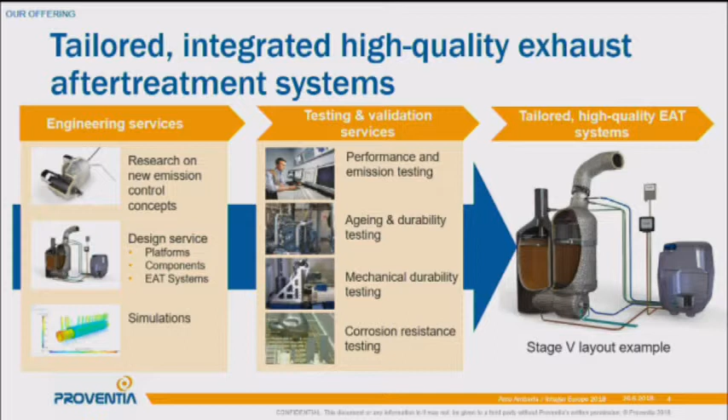Other business area is test solutions, where we are doing container-sized test cells. Our activities cover engineering services of the after-treatment, all the testing validation on the product, and then eventually also manufacturing of the systems for Stage 5 and other emission requirements.

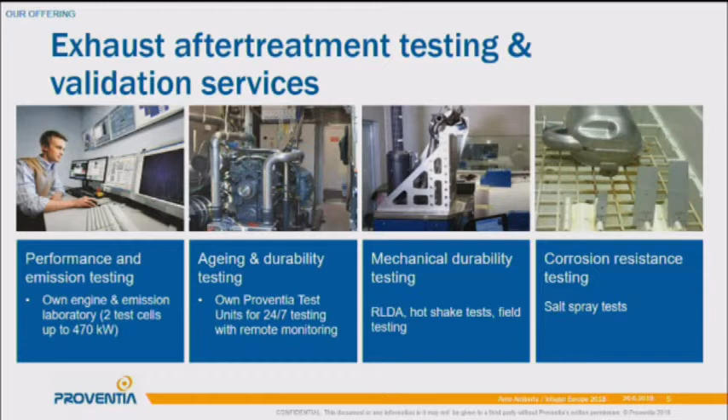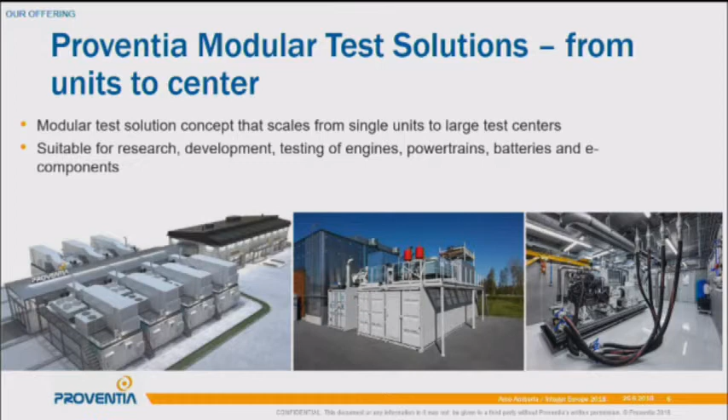So we do in-house performance emission testing, aging and durability testing of the systems, mechanical testing as well, corrosion testing. On the test solution side, we can do container-sized test cells for diesel or other fuel cells or other fuel combustion engines, as well as the whole drivetrain, including possible hybrid units in the drivetrain.

Then going to Stage 5, state-of-the-art design and experience. The market drivers, they are the same as what was also mentioned by Mr. Joshi from Liebherr. So the fuel economy, cost efficiency of the systems. Right now, Stage 5 and China 4 are having a discussion of possible EGR dropout. That increases engine-out NOx emissions, and therefore SCR has to have higher efficiency.

Also, it's expected to have engine rated speed drop down, also because of saving fuel, and real-world emissions and in-use testing is going to be in place on Stage 5, and therefore the actual emissions from the engine has to be at a low level in any use.

Limited space and compact design, that is always the driver on the non-road side. All the manufacturers are claiming that their application is the most difficult in terms of space. That is what we have heard, whether it's tractor, excavator, or whatever application, always the manufacturer says that their application is the most critical in terms of space.

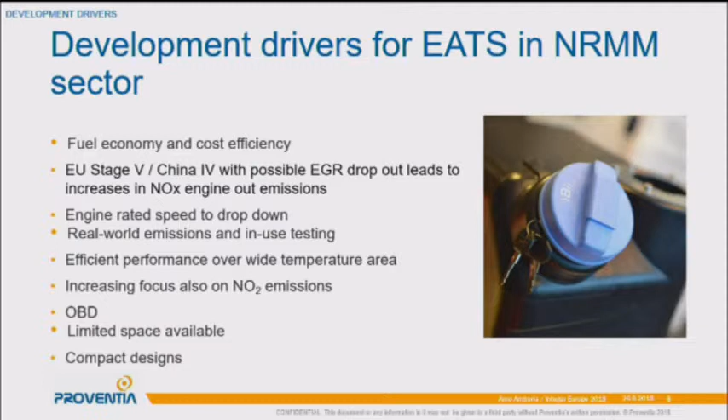The high NOx reduction target is challenging. We have to inject more urea at low temperatures. Possible wall wetting leads to deposit formation on SCR. Hopefully, all the AdBlue or urea that is injected is converted into ammonia and becomes part of the SCR reactions.

Many SCR catalysts can reach 99% NOx reduction efficiency at optimum conditions. Then it's a little bit of choice of the manufacturer on which area and what temperature they are operating, and what kind of catalyst they are going to choose.

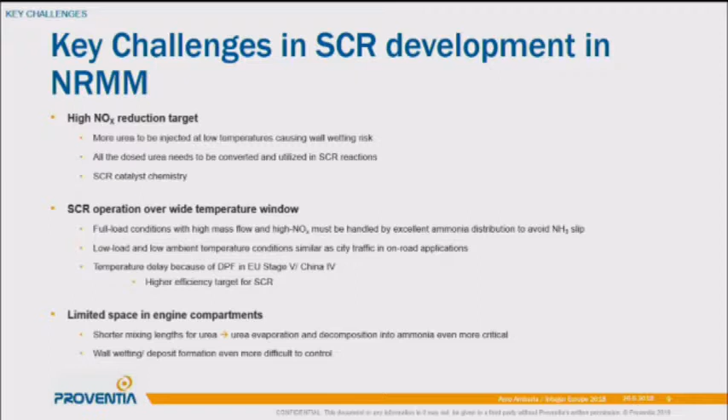From the SCR point of view, there are low temperature sides and also high temperature sides. It can be on the same application. It can be a seasonal machine. So in certain seasons it works at low temperatures, and in certain seasons it works at high loads and very high temperature. The same system has to comply and be effective in both seasons and both engine load conditions.

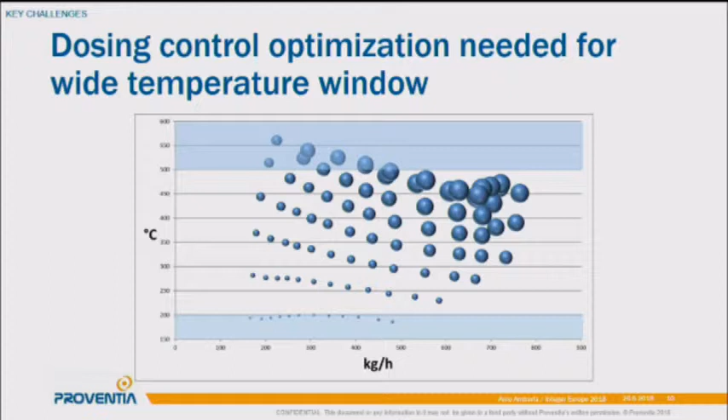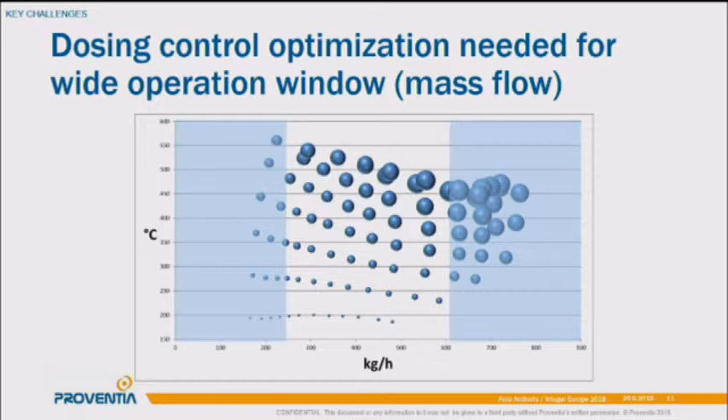Same applies on the mass flow. It can be low mass flow or high mass flow depending on what the machine is actually doing, and therefore the system has to be designed to meet demands and targets in both cases.

On the SCR side, there are two main criteria we are dealing with. One is that the urea mixing at low temperature and the dosing should start below 200 degrees C. 170 degrees C is one example. It can be a little bit lower or a little bit higher, depending on what kind of engine it is and what kind of dosing strategy is chosen.

And then at the SCR, flow characteristics should be at a high level, meaning flow uniformity index about 0.96 and ammonia uniformity index about 0.98. That is a tough target, and it should be met at many different load conditions.

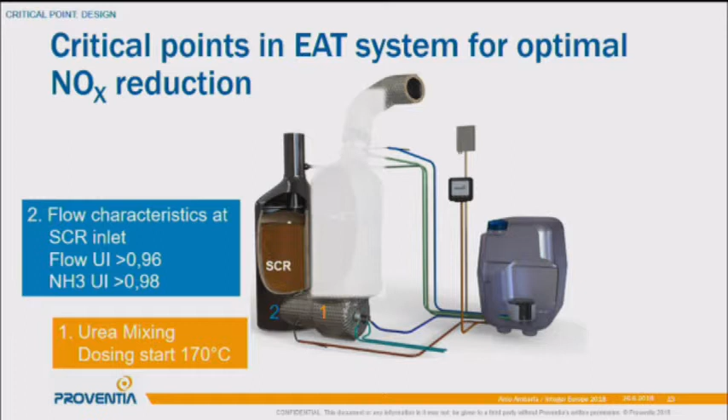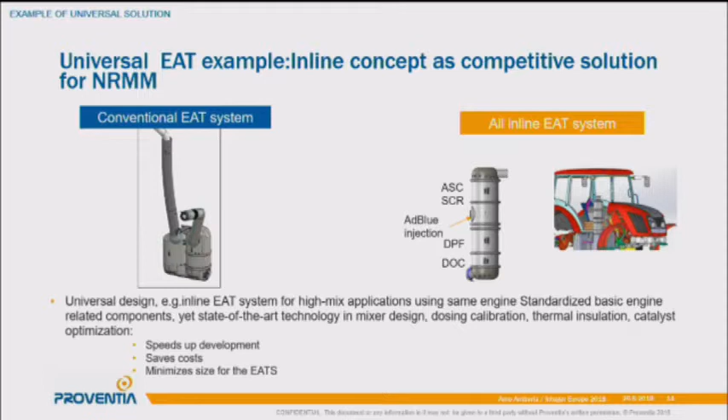These both should meet the uniformity index targets. For example, on this inline concept, this can be a scalable system starting from substrate diameter of 7.5 inch up to 13 inch of diameter. Then it covers engines from 56 kilowatt up to about 300 kilowatt.

For example, on about 100 kilowatt engine, the diameter of substrate is 7.5 or 8.5, and external diameter of about 260 millimeters, including insulation, and keeping the total length below 1 meter.

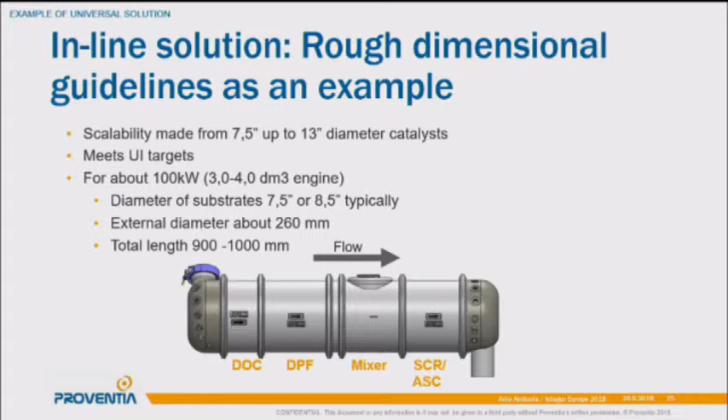Or it can be a conventional but very flexible after-treatment system, where the SCR mixer and DPF are all standardized, but DOC inlet and SCR outlet parts are custom made for different applications, making it very flexible. It can be either fitted on top of the engine or located remotely from the engine at different angles and positions.

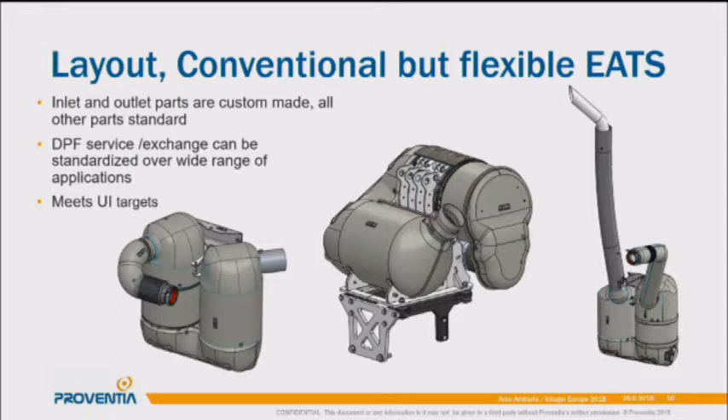With a good mixer, either in the inline concept or the standard one, we are using a so-called super tornado mixer, where we have high dosing amounts. In this case, over the dosing map, we have normalized as number one the injection alpha 1 values from the engine side, and on the blue bars we can see the safety and the optimization margin on different engine points.

That safety and that optimization margin can be utilized to change engine-out baseline to higher fuel economy, or to start dosing at a little bit lower temperature, or to make a little bit more compact system. So it depends on the application and customer requirements — different weighting of the benefit can be used.

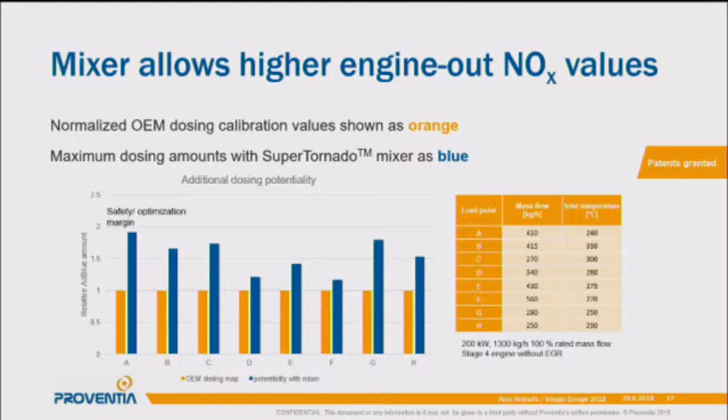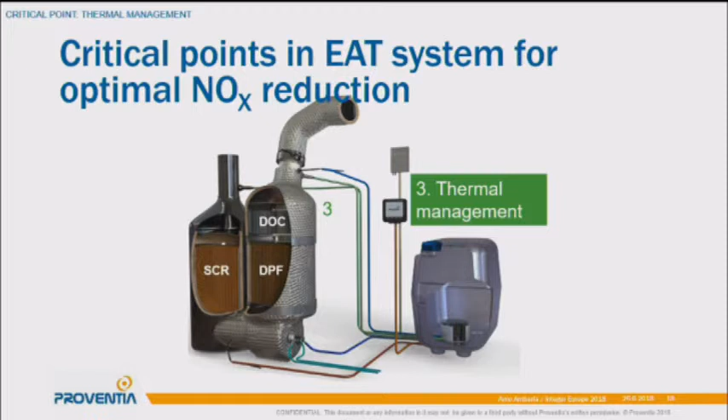Another very important thing on the design is thermal management, as we are seeing idle operation and low temperature operation. Thermal management, so that all the heat is used on the catalytic reactions, is crucial. For that, thermal insulation is a must on after-treatment components, but it's also possible to have it on engine components, including manifold and turbo.

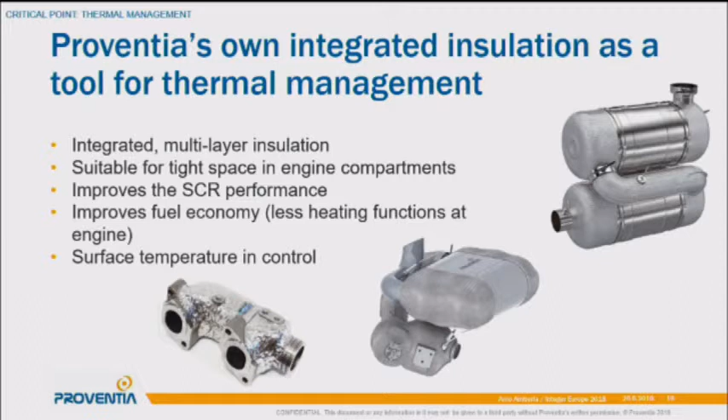Basically, this improves fuel economy by the function that we don't have that much of heating functions from the engine side, and we are keeping all the heat in the right place for catalytic reactions. On the other hand, we are also keeping the temperature at the engine room low, so that we don't have to have extra cooling to cool down the engine compartment.

For this we have a lot of data. Starting from the simple pipe connection, we can see that the benefit with insulated pipe is something between 5 to 10 degrees C, just over the pipe length, and the greatest benefit — less heat loss, thermal loss — takes place at low load conditions, which is when we have the most challenging conditions already from the beginning.

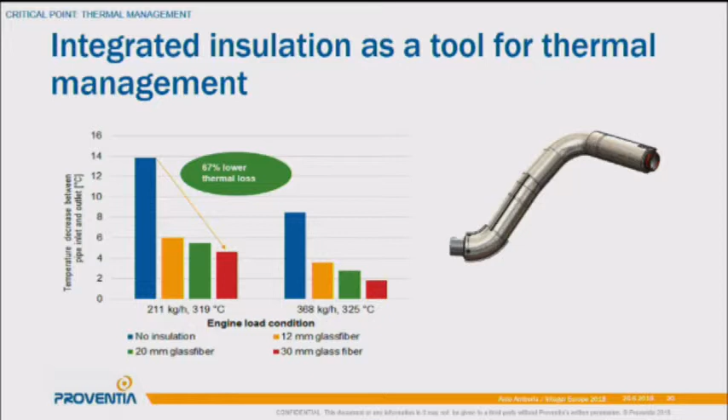Then we have here an example of insulated manifold and turbo. Some graphs coming. This was tested at about a 7-liter non-EGR engine at a very low power rating, so it was the most tricky condition available on that engine. It was a stage 5 engine with active thermal management, but had the same calibration.

From the mass flow, we saw that during some operations the engine had fewer heating functions with this insulation. That might have had an effect on fuel economy, but in this test it was not possible to find out how much the fuel economy improvement was with insulation.

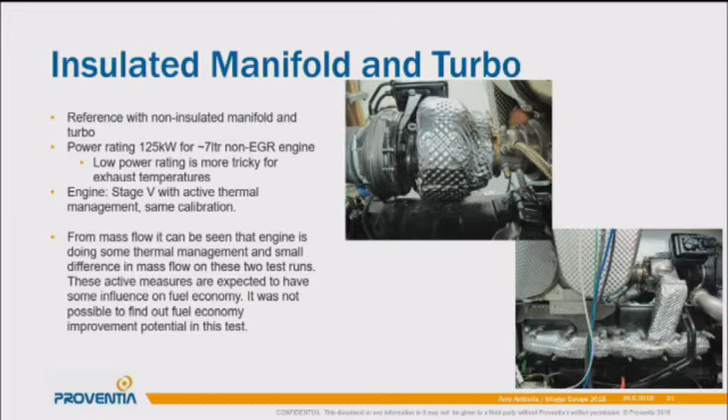At steady state conditions, the insulation gives a benefit of about 10 degrees C on the manifold and turbo insulation. So to sum up the previous slides: about 5 to 10 degrees C benefit from the connection pipes, summing up to somewhere between 15 to 20 degrees C benefit from overall insulation.

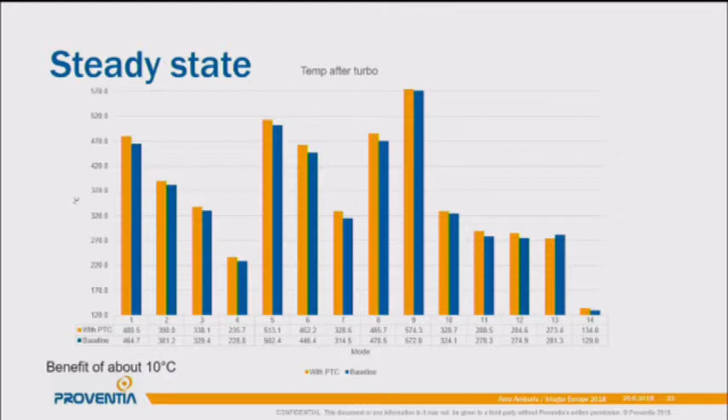On the non-road transient cold cycle, it was seen that the benefit of insulation on the manifold and turbo did not have too much of a role in the beginning. The heat mass on the manifold and turbo was playing the biggest role in the first sections.

What was seen in the middle of the test cycle was less active thermal management when the insulation was installed on the engine.

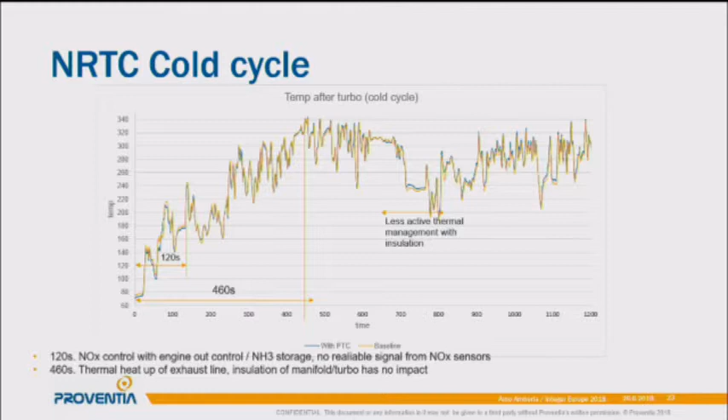One big advantage came at the beginning of the hot cycle, as after 20 minutes of soak time, heat remains more in the manifold and turbo. So those components were hotter, and heating of the after-treatment was faster, resulting in the injection being started earlier in the test cycle.

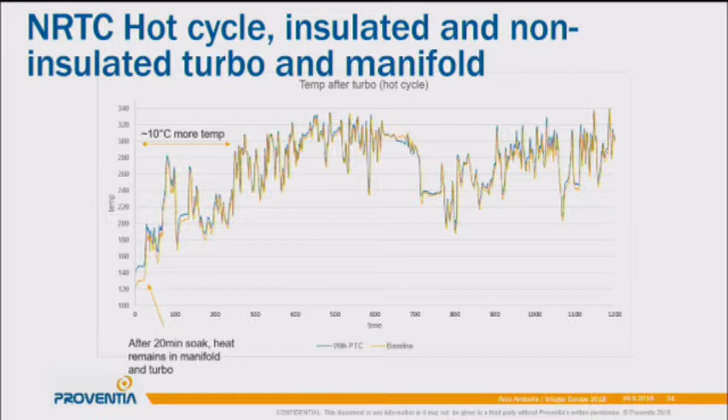On the hot non-road transient cycle, the NOx reduction was 99 plus, resulting in 0.06 grams per kilowatt hour, and combined 0.2 grams per kilowatt hour.

If that result is going to be improved further, it needs more function in the beginning of cold phases, especially on the cold start. Either it needs EGR, more close coupled design, or mass decrease, and the benefit is case depending whether it's beneficial to invest on those components or those methods or not.

A bit surprisingly, the insulation had no or little influence on the cold NRTC NOx emissions, and that is partly because of the heating phase. There is no heat radiation taking place, and all the extra heat is used to warm up the components inside the insulation.

But definitely easier control of hot cycle and faster dosing start, that was concluded with the insulation.

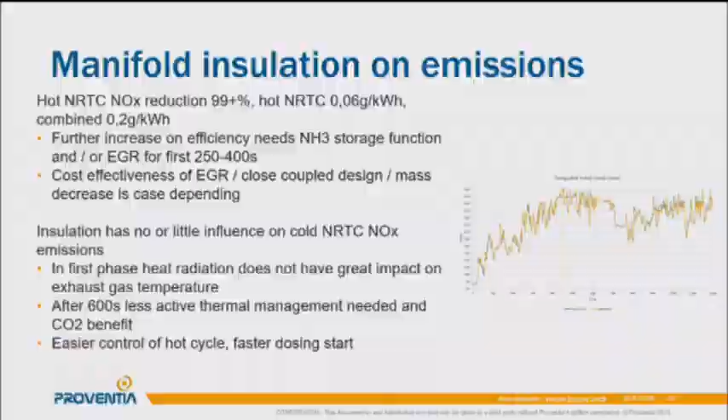Onboard diagnostics, to have this high ammonia uniformity index, it's needed to have some sort of validation method, and we are using ammonia scanner at the SCR outlet face.

That requires only 25 millimeters free space after the SCR surface, and if the SCR dosing is done at alpha 0.8 or 0.9, we can calculate NH3 using NOx values.

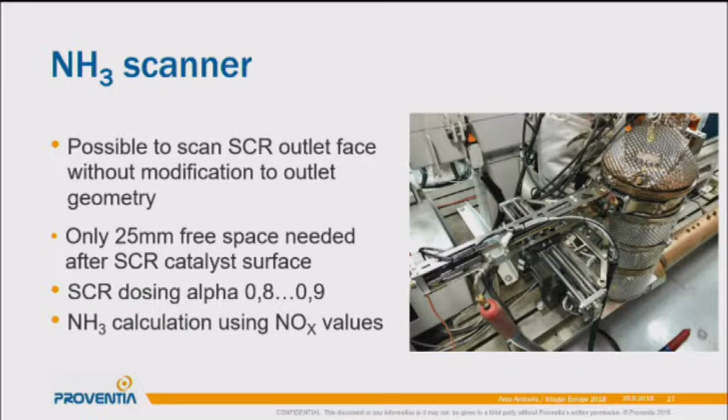And in many cases, and in these cases, we are using 25 different positions on the scanning, and they are equal on area, what they are measuring at the outlet.

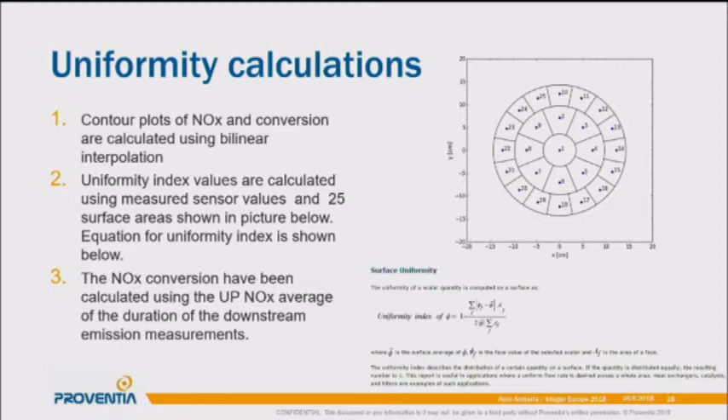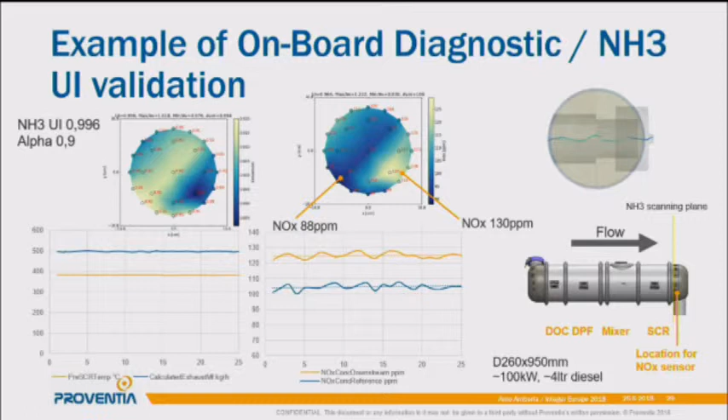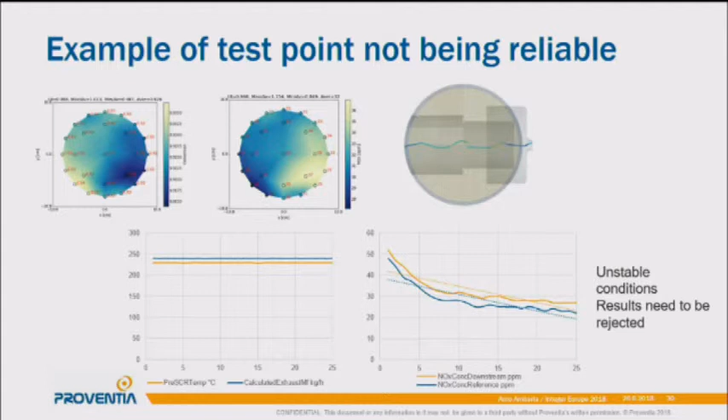So this concludes that the NOx sensor positioning has to be checked even on stage 5, and in any of those low emission cases. This can be done by comparison of NOx sensor signals from reference sensor, which is located further downstream of the system, compared to the NOx sensor, test NOx sensor, which is close on the SCR.

And it can be seen that in many cases some sort of mixer before outlet NOx sensor is needed to have it on representative values in all engine operation points.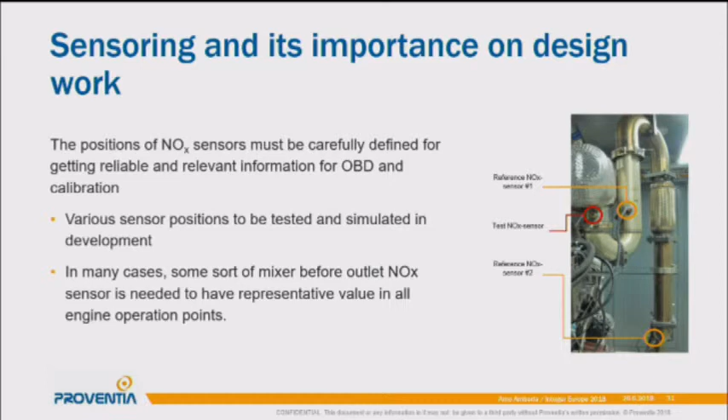A bit on the emissions and its monitoring. Proventia is having a Procare Drive emission monitoring system. This gives real-time emission data transparently to operator.

This is based on signals of vehicle sensors, and it doesn't replace the PEMS, and poor location of NOx sensors gives inaccuracy to results. In general, we have seen that this system gives always pessimistic results compared to PEMS. If PEMS is the real, then we are showing worse results than the real emissions are.

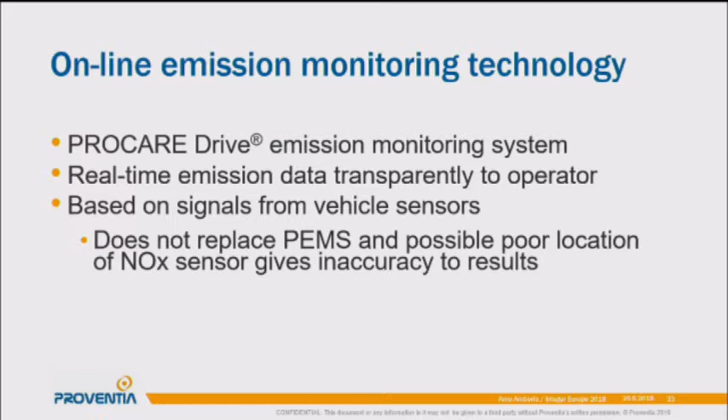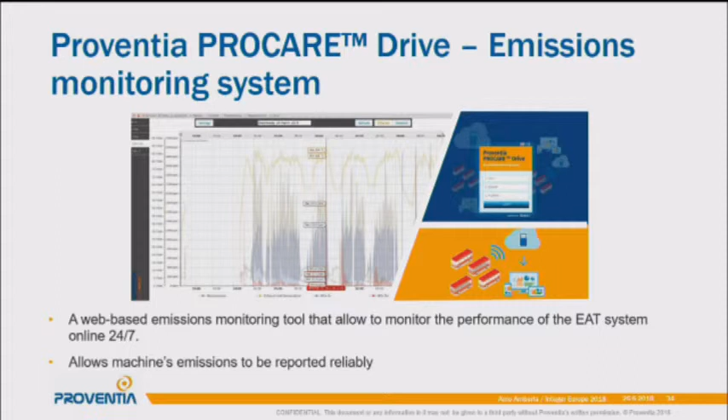This is web-based. We are sending all the information to cloud, and it allows machines' emissions to be reported reliably and daily.

From the left corner we see hourly sum of NOx reduction values. Then on the top view we see a snapshot, or we can select any time of operation, and then we can go a little bit further down to see how reliable the data is, and how all the data second by second, vehicle speed, operation, all the parameters we are getting from the CAN bus.

But again, this is based on the sensors which are in the machine or vehicle, and we have to rely on those, and if they are incorrect, then this result is also partly incorrect.

But this is very powerful tool for field test to reveal possible design and calibration errors before the systems go on serial production. It's also possible to check with two sensors difference between sensor signals.

If there's a reference sensor located on position which gives average reading of NOx, so with a mixer or further downstream from the system.

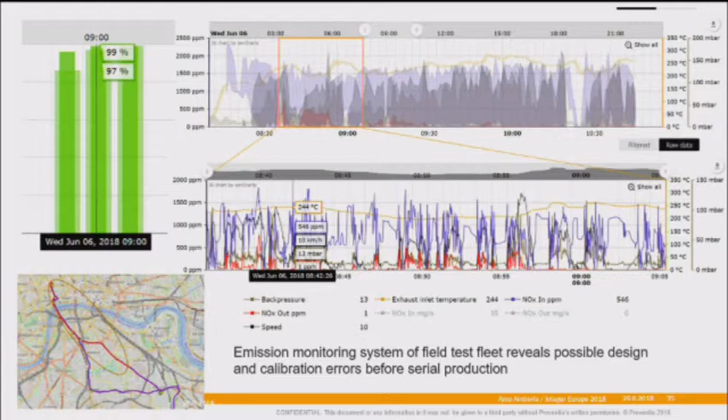To sum up, meeting ultra-low emissions, and also including stage 5, compact, flexible design of after-treatment system is needed. Thermal insulation plays more role. Also the thermal management on the engine side, but then it's a balance of CO2, where to put and how to get the CO2 benefit.

SCR catalyst which is chosen has to have high usage, meaning ammonia uniformity index above 0.98. Good choice on the catalyst. There are different catalyst types available, and all they have good points and also perhaps also bad, not that good characteristics.

Sensor positioning for accurate OBD plays a big role. Otherwise, the readings what are getting for the OBD, they could be somehow false.